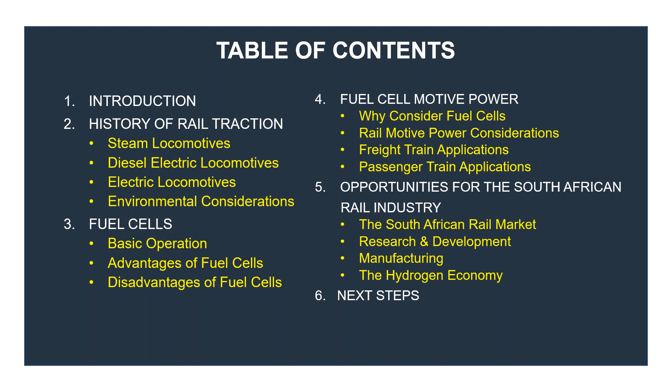Thank you for the kind introduction, Mr. Zwane. I will delve right into my presentation. My presentation will go through a brief introduction, a short history of rail traction. Obviously, during this short time that we have, it's not possible for us to get into a lot of detail, so it will be pretty fast. We'll then delve into the basic operations of fuel cells, fuel cell technology, and then consider in a little bit more detail how they can be and how they are already being applied in the railway industry. And then lastly, we'll look at the opportunities for the South African rail industry.

The situation we find ourselves in as human beings is that as we have advanced our civilization, that has come at great cost to the environment. The degradation to the environment wasn't really deliberate, but a lot of the circumstances were unforeseen. For instance, when the steam engine was first discovered, and the steam locomotive came into being, when we started building large coal-fired power stations, we were not really aware at that time of the negative consequences to the environment. But these are things that have come to, if you like, haunt us later on.

And railways, being a part of the improvement in civilization, have also come at great cost. And that's why we have progressed from steam locomotives to diesel electric locomotives to electric locomotives. And at the present moment, we're now looking at making railways cleaner and greener, and less polluting to the environment.

The unfortunate place we find ourselves in right now is, I believe, that we are part of that cohort of humanity that is tasked with doing something now, something tangible for the environment. Otherwise, we'll lose it completely for future generations. So basically, this presentation is a short look at how railways can become less polluting.

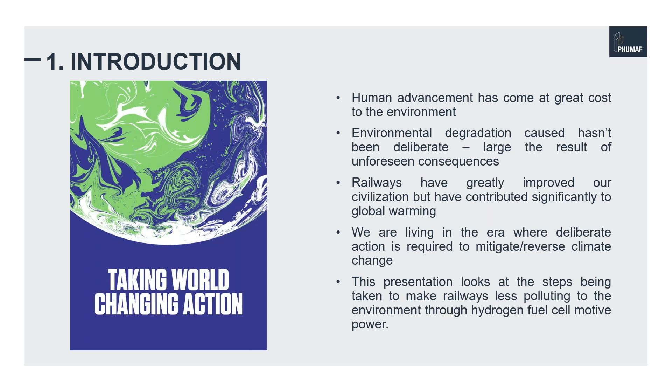What's already happening within the railway industry worldwide, and how South Africa can also become part of that revolution. If you look at the history of rail traction, we have come from animal-hauled railways back in the 6th century BC in Corinth, Greece. Modern railways really developed as a result of the invention of the steam engine, leading to the steam locomotives in the early 19th century, especially in Britain.

What happened then was that the railways reduced the cost of doing business, cost of shipping and communication, and the economic benefits to society were huge. But as a result of some of the inefficiencies, we needed to improve, and so railways became electrified. We started using diesel electric locomotives to the extent that right now, worldwide, probably the largest source of rail motive power is diesel electric locomotives.

But because of the pollution problems that we face as humanity, there is now a drive to electrify railways, as well as to see how the electrified railways themselves can become less polluting.

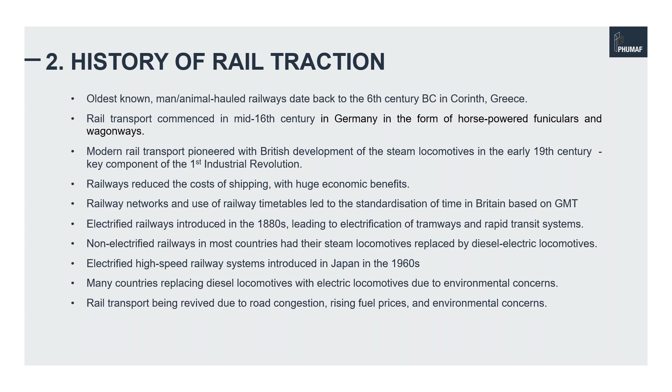The first real mover for railways was steam locomotives, and the operation and technology was simple and basic. Coal being the fuel source, you use a boiler to heat up water, and you use steam as the source of your motive power. These steam locomotives became prevalent in Britain during the 19th century, and they were used in the railway industry for quite a bit of the 20th century until about mid-20th century.

The major drawbacks were the limited efficiency, as well as the huge environmental problem we get from using steam locomotives. What's on the screen right now is a typical steam locomotive, showing its characteristics. The overall efficiency was basically up to a maximum of about 10%, with a huge emissions problem: sulfur dioxide, carbon dioxide, nitrates, particulates, and heavy metals.

As a result of these two issues, the inefficiency of the motive power source as well as the huge emissions problems, the steam locomotive was gradually phased out, to the extent that now very few railways worldwide use them. You can still jump onto some tourist or vacation trains that are run on steam locomotives, but as a commercial source of motive power, steam locomotives have largely been phased out.

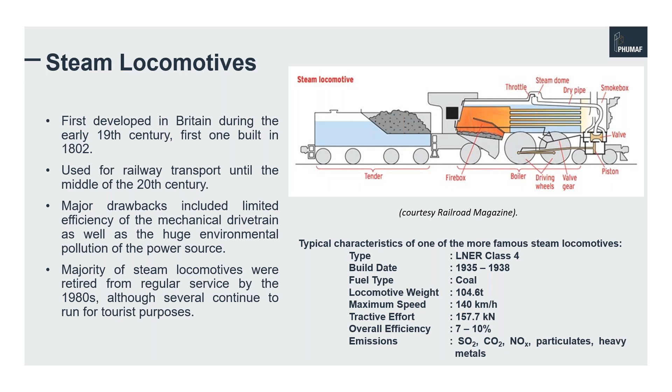Then we basically moved on to diesel electric locomotives. Essentially what happens in a diesel electric locomotive is we take an internal combustion engine running on diesel fuel and use that to generate electricity on board the locomotive. Early locomotives used to have DC generators, then we had alternator rectifier combinations, but these were used to drive DC traction motors initially, and then with the advancement of technology and improvements in AC drives, we tended to use AC drives for these locomotives.

The main advantage over steam locomotives was the improvement in efficiency, which came about as a replacement of the mechanical drive train by using electric transmission. So there is no direct mechanical coupling between the power source and the traction motors, and this resulted in a huge improvement in efficiency. Unfortunately, we still remained encumbered with emissions problems: carbon monoxide, carbon dioxide, nitrates, as well as particulates. However, the majority of locomotives still in use today are diesel electric locomotives.

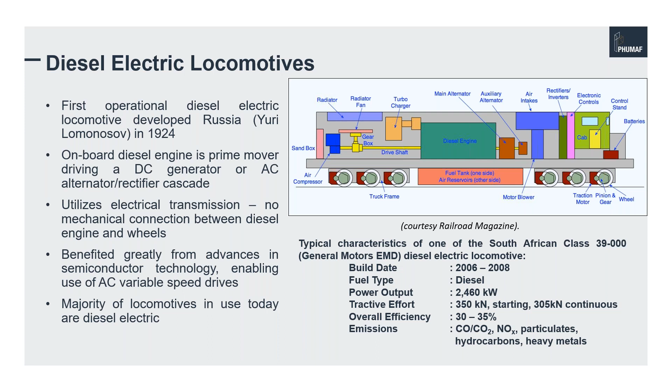But if we move a little bit forward, we then have electric locomotives. What happened here was we replaced the onboard generation of electricity on the locomotives by sourcing the electrical power from an external source, i.e. from the national grid via the pantograph on the locomotive.

This vastly improved the efficiency of the locomotive, if we ignore the source of the electrical power we are utilizing. So we don't have a diesel engine, we don't have a generator on board; we have bulk power components which are static and efficient. We had a huge increase in motive power as well as a huge increase in efficiency, and if we ignore the fact that this electricity is being generated somewhere else, then we also don't have negative harmful emissions from the locomotive. So very little emissions produced, and much less maintenance compared to the diesel electric locomotive.

And the trend nowadays is for most railways to actually electrify. Of course, the main issue that comes with using electric locomotives is that you need the supply infrastructure, i.e. your overhead catenary systems, or OHTE, which is our local nomenclature here, and that also then increases the cost of running electrified railways. But from the emissions point of view, from the pollution point of view, there is a vast improvement when you compare to diesel electric locomotives.

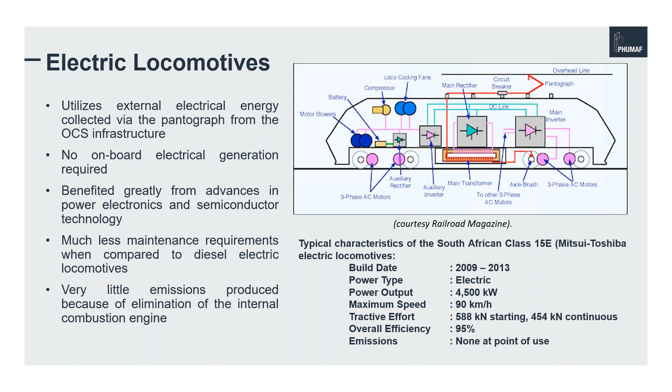So basically, quickly running through the environmental considerations, advancement has come at great cost. Rail transport, although it has improved the lives of people, has had a negative impact on the environment. Steam locomotives were extremely inefficient. Diesel electric locomotives gave us a vast improvement as far as efficiency is concerned over steam, but again, we still remained encumbered with the emissions problems. Electric locomotives are non-polluting at the point of use.

That is, when the locomotive is on the track, drawing power from its pantograph and pulling the train, we can consider it non-polluting there. But for us to be holistic and actually fair, we need to consider where that electrical power is coming from. In our country, in South Africa, the bulk of that power is coming from a coal-fired power station. And so from an environmental point of view, we must then include the efficiency of our coal-fired power stations.

And then if we do that, you'll find that the real life efficiency of the electric locomotives drops from 90 to 95% to somewhere around between 30 and 40%. And then also when we say it's got zero emissions, when we include the emissions of the power source, then we realize that it really is not that clean after all.

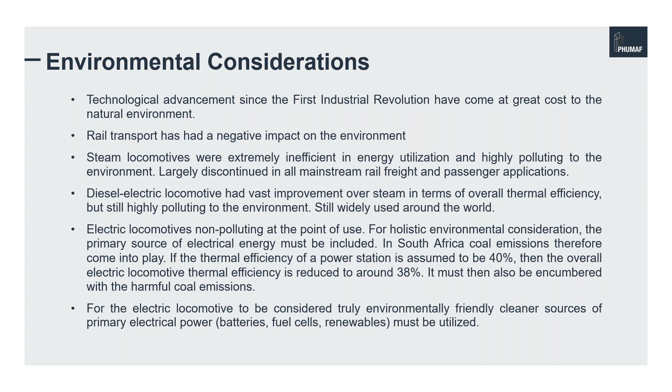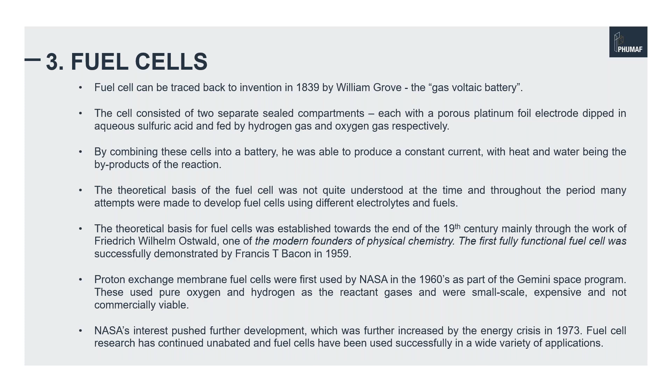Fuel cells. What I realized is it's a very interesting branch of chemistry or electrical engineering, and we really will not have much time to delve into fuel cells, but they can be traced back to 1839. And basically, in its basic form, let me move from this slide. These slides will be available for anyone who would want them. If I can basically go to the next slide.

The fuel cell basically uses hydrogen and oxygen as the anode and the cathode. And in this respect, it is different from the battery, because in the standard battery, the anode and the cathode are basically part of the construction, and they are consumed during the operation of the battery. Obviously, if it's a rechargeable battery, we can restore them. But in a fuel cell, the major difference is that the anode and the cathode are consumables.

So depending on the supply of the hydrogen or the oxygen, which basically depends on the type of fuel cell, the operation of the fuel cell is not really dependent on anything. Nothing needs to be replenished as long as you've got sufficient hydrogen and sufficient oxygen to supply the fuel cell.

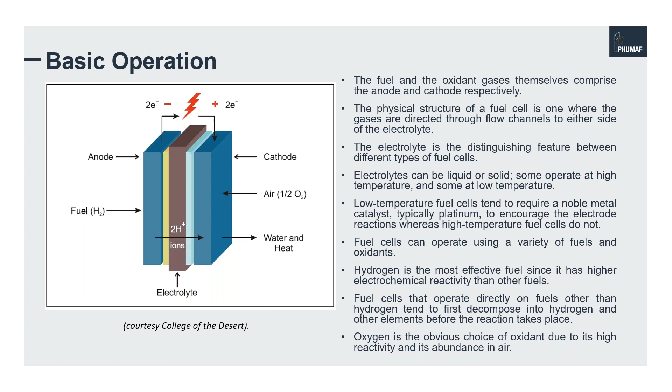So what I'm going to do here is basically go through quickly the different types of fuel cells. I think we can find this in the literature, and we don't have enough time to dwell a lot on the fuel cell itself. One of the more commercial types of fuel cells is the alkaline fuel cell. It operates on compressed hydrogen and oxygen and an aqueous solution, usually of potassium hydroxide, as the electrolyte. The operating temperature is relatively on the low side, between 150 and 200 degrees.

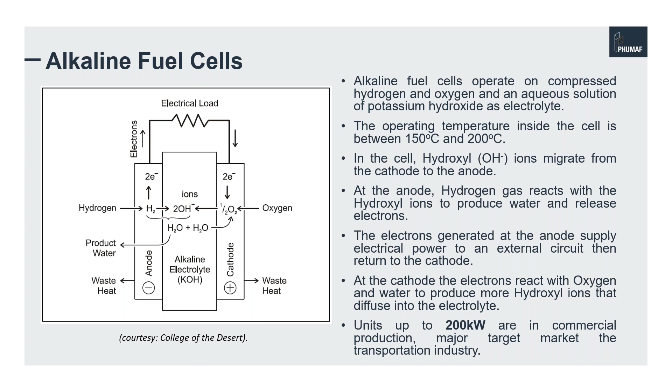And then there's a bit of a description on the actual transport mechanism within the cell itself. But I think the important thing is that commercial units of up to around 200 kilowatts are in current production right now as we speak. And then in the next slide, I discuss the advantages and disadvantages of alkaline fuel cells. They operate at low temperatures, have fast startup times, and a very high efficiency up to 70%.

They need little or no expensive platinum catalyst. Platinum, depending on the type of fuel cell being used, can be a very high cost component in the construction of the fuel cell.

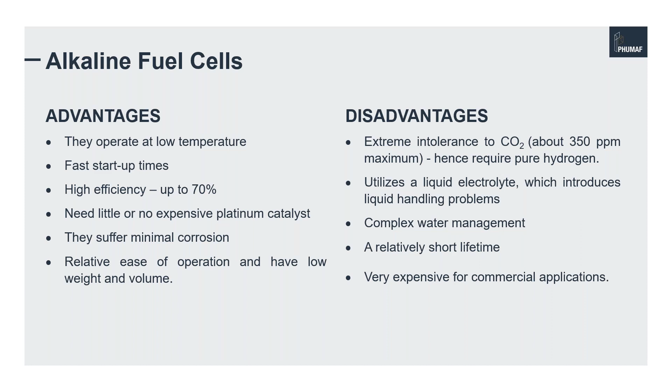On the disadvantaged side, they have an extreme intolerance to carbon dioxide, and the fact that the electrolyte being used is a liquid introduces handling problems. There are also water management problems within the cell itself, and it's got a relatively short lifetime. But they are in commercial use and operation, and there is an example of an alkaline fuel cell powering telecoms equipment somewhere in the Scandinavian part of the world.

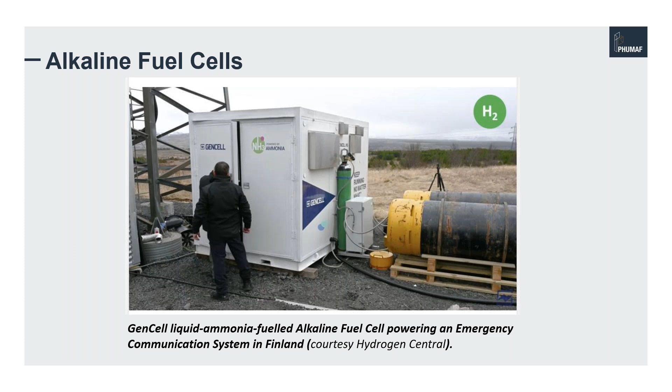The next major fuel cell type is the molten carbonate fuel cell. These use carbonates as salts. These salts are heated to quite a high temperature, where the salt melts and conducts carbonate ions from the cathode to the anode. Then again, we go through the transport mechanisms.

Demonstration units have been produced up to 2 megawatts. That's quite a vast improvement from the alkaline fuel cell, and designs exist for units of up to 100 megawatts.

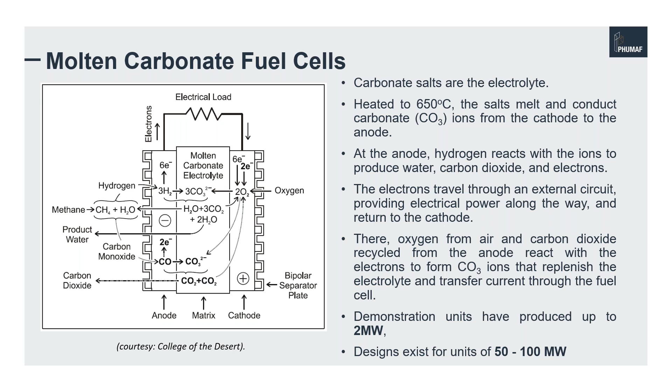The advantage is that they support internal reforming of hydrocarbon fuels. They also generate high-grade waste heat, which can be very useful in combined heat and power applications. This makes molten carbonate fuel cells very useful and suitable for stationary applications. Fast reaction kinetics means efficiency is also relatively high.

On the disadvantages side, corrosion becomes a major problem, and they are also highly intolerant to sulfur. We still have the same problem of a liquid electrolyte that introduces handling problems, and molten carbonate fuel cells unfortunately require a considerable warm-up period. That's because you've got to heat the carbonate until it melts in order for the cell to start functioning properly.

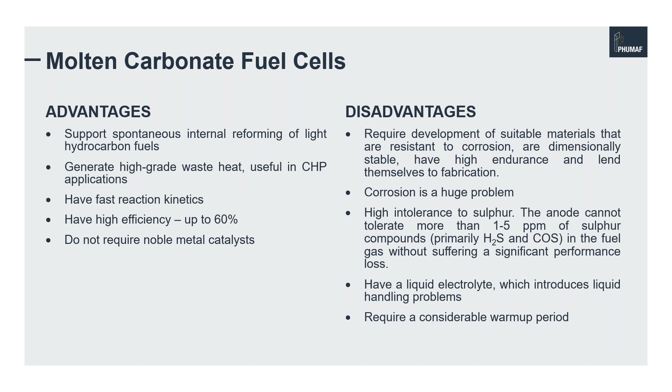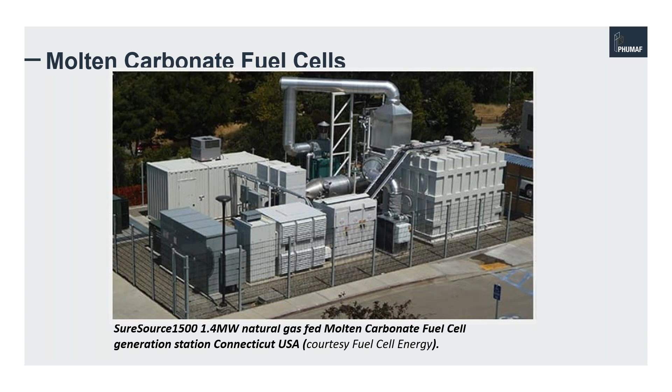The next major type of fuel cell is the phosphoric acid fuel cell. Again, this one operates at relatively low temperatures. It uses phosphoric acid within a silicon carbide matrix as the electrolyte. Again, we go through the transport mechanisms.

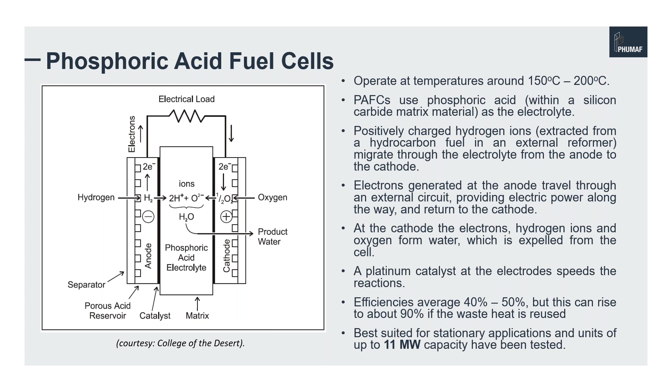The efficiency of this cell is basically up to a maximum of around 50%. But if the waste heat produced in the cell is used to regenerate electricity, then you can increase that efficiency to around 90%. It's best suited for stationary applications, and units up to 11 megawatts have been tested.

The major advantage is that the phosphoric acid fuel cell is highly tolerant to carbon dioxide. As a result, you can actually use unscrubbed air as the oxidant and reformate as fuel. It operates at low temperatures, as we saw, and it's also got stable electrolyte characteristics.

On the disadvantages side, we have low carbon monoxide tolerance. It uses a corrosive liquid as electrolyte, and that becomes problematic as far as handling is concerned. It also allows product water to enter and dilute the electrolyte. Phosphoric acid fuel cells tend to be large and heavy, and they can't auto-reform.

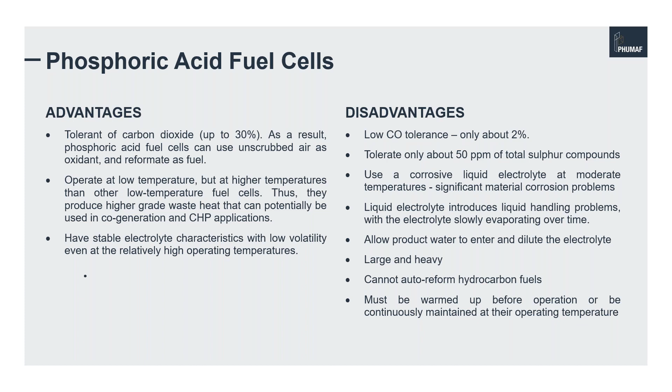The next type is the proton exchange membrane fuel cell, the PEM fuel cell. This is probably one of the more popular ones, especially when it comes to transportation applications. Toyota has got a vehicle - I haven't seen one in South Africa, but there are quite a few examples worldwide. The Toyota Mirai, which is a hydrogen-fueled car, actually uses PEM fuel cells.

Basically, these work with a polymer electrolyte in the form of a thin membrane. The membrane is small, it's light, and it works at low temperatures, which is an advantage. Unfortunately, this particular fuel cell requires a platinum catalyst on both sides of the membrane. Then we go through the transport mechanism within the cell itself. Efficiency is in the region of 50%.

If you are to use this with any other source that is not pure hydrogen, then you need a reformer, to use other fuels, like methanol or natural gas or whatever.

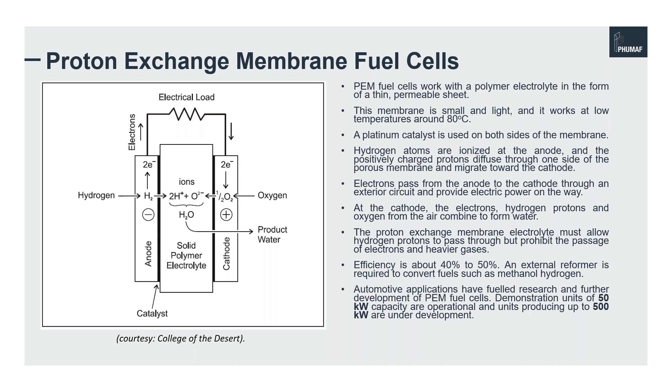The advantages of PEM fuel cells: they are carbon dioxide tolerant, they operate at low temperature and pressure, and this simplifies the materials that we need to use, and it also provides for quick startup. They use a solid electrolyte, so the issues of handling liquids become less of an issue. They use a non-corrosive electrolyte. Pure water operation minimizes corrosion problems and improves safety.

On the disadvantage side, we still have the low tolerance to sulfur compounds. It needs reactant gas humidification. This can be energy intensive and increases the system complexity, which then has the tendency of reducing the overall efficiency of the system.

Unfortunately, it requires the use of the platinum catalyst. I think that's one of the things that we have to trade off for the low temperatures and ease of operation of this fuel cell. And the use of the expensive membrane that is difficult to work with can be an issue. But the way manufacturing is right now, it's actually becoming a very mature kind of fuel cell, and some of these things are becoming less and less of issues.

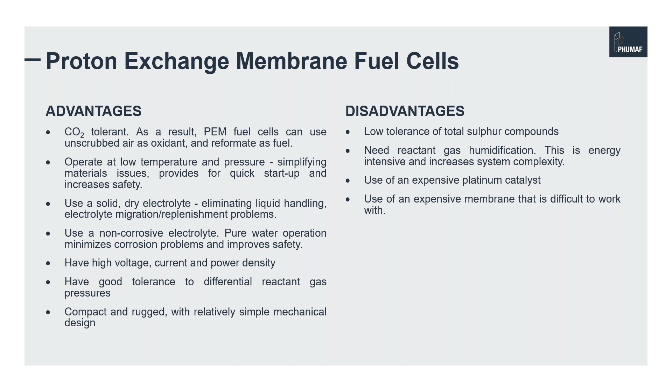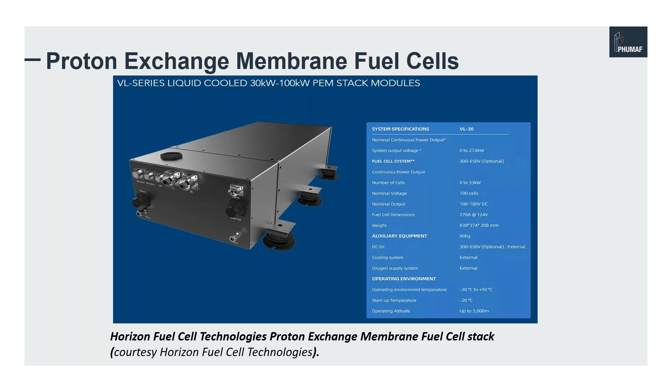That's an example of a fuel cell stack from Horizon Fuel Cell Technologies. And the transportation industry, being cars as well as buses, have actually driven the development of PEM fuel cells.

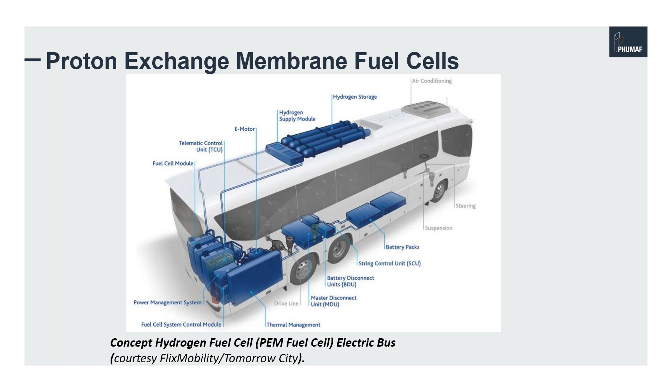The last fuel cell type that I'll talk about now is the solid oxide fuel cell. This uses a hard ceramic electrolyte and operates at very high temperatures, up to about 1,000 degrees Celsius. A mixture of zirconium oxide and calcium oxide forms crystal lattice, though other oxide combinations can be used.

The generating efficiencies of the solid oxide fuel cells are actually up to 60%, and they are best suited for stationary applications. Demonstration units, up to 100 megawatts, are under development.

What I find a little bit exciting about solid oxide fuel cells is I believe that there is a company already in South Africa that is embarked on the manufacture of these fuel cells, and I see a lot of opportunity for these fuel cells, especially the solid oxide fuel cells, in terms of storage and in terms of being coupled to some of the renewable energy sources that we have, to make the power that's being generated there more dispatchable.

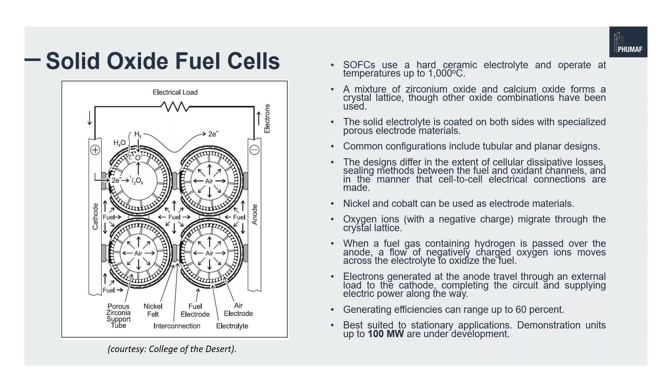So we then go through the advantages and disadvantages of solid oxide fuel cells, and the major disadvantage is obviously the very high operating temperature, and that's why they are really only suited for stationary applications.

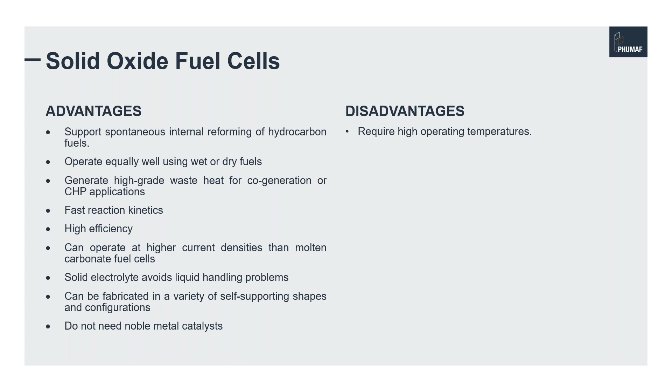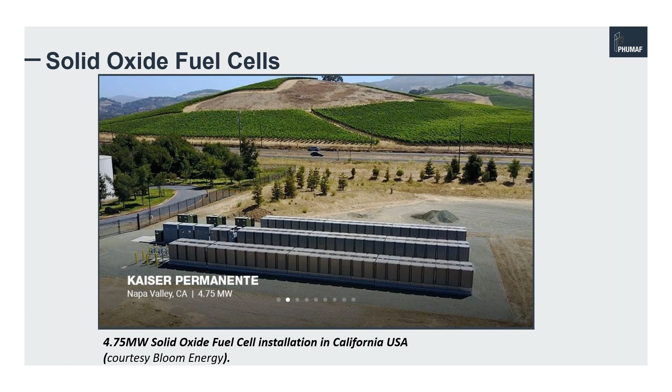Again, they are in commercial applications, and that's an example of a 4.75 megawatt solid oxide fuel cell installation in California in the United States.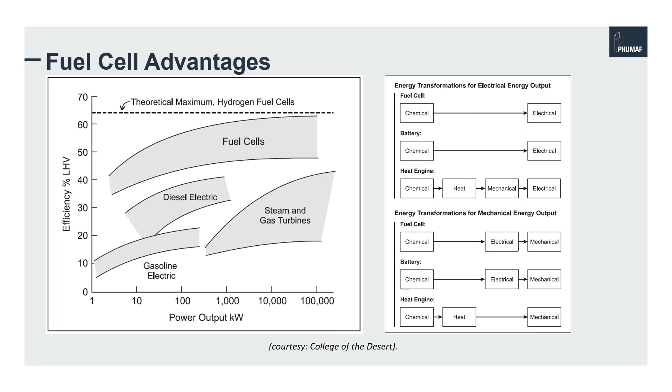I think I need to be moving much faster than I am. On the side there, there's a slide on the energy conversion, comparing the fuel cells, the battery, as well as the internal combustion engine. I think I'll skip that. Basically, that's a comparison of the fuel cell technologies that we've already gone through.

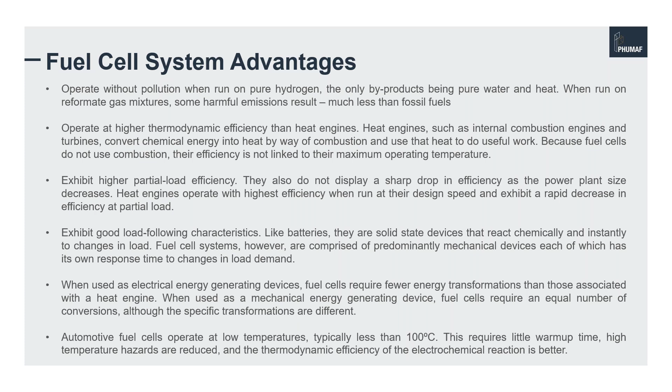So the advantages of fuel cell systems, basically, it gives us the opportunity to generate electricity with little or no pollution. I must emphasize here that it's zero pollution if we're running it only on pure hydrogen. But then again, the question comes, how was that pure hydrogen sourced? If our hydrogen has been manufactured through electrolysis using renewable electricity, i.e. electricity generated from solar, wind, or other renewable sources, then we can consider the fuel cell pollution-free. But at the moment, the bulk of the hydrogen that's commercially on sale is what you could call either gray or blue. And what that means is that the hydrogen fuel cell will only be pollution-free at source. But when you consider the overall environmental impact, then it's not completely pollution-free.

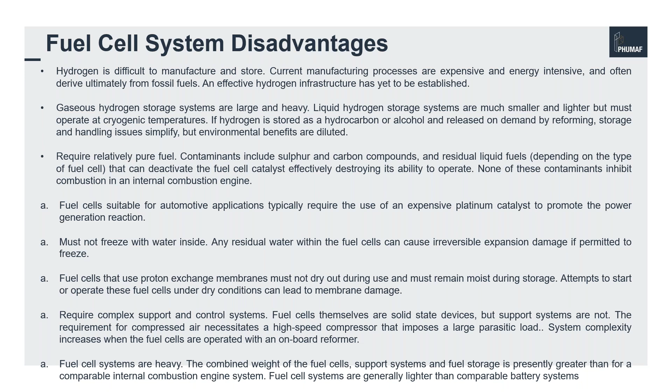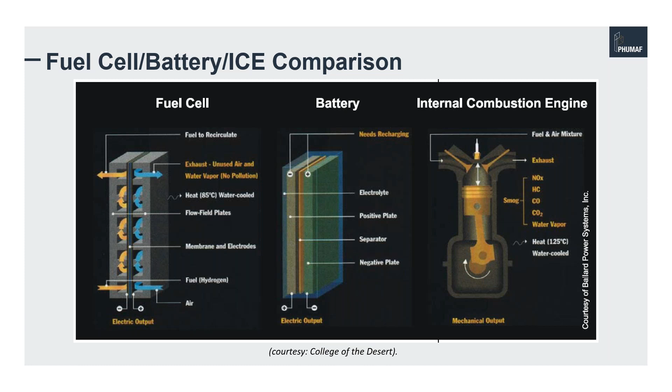There are some disadvantages which relate to manufacture, which also relate to storage. A lot of these disadvantages, we are finding ways around, to the extent now that we can actually utilize fuel cell systems in a safe and environmentally friendly way. Again, that's another slide that basically compares the fuel cell to the battery, to the internal combustion engine.

So as far as the power source is concerned, whether it be a steam locomotive, i.e. coal firing a furnace which heats up a boiler to give us steam, or whether it's the diesel engine, the diesel fuel in the diesel engine, or electricity, what is required is for the power to be available to the locomotive or to the train at every part of its journey. In other words, the instantaneous power output of the locomotive or of the source must always match the instantaneous power demanded by the load as the load is changing. And also, it is important that the power unit operate in its optimal or safe operating region throughout.

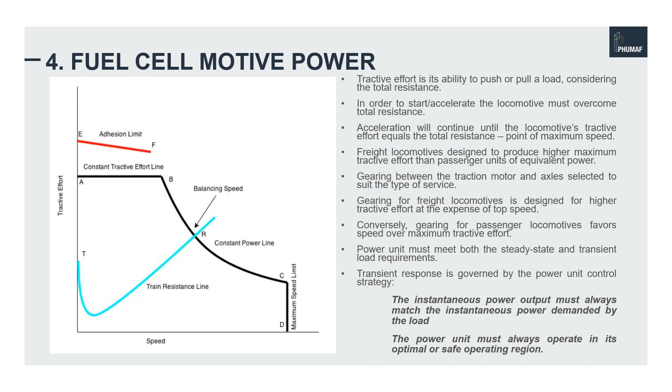So why should we consider fuel cells in the rail environment? I think the main focus for transportation up until now, and now I mean maybe 5 or so years ago, has been on trucks, on buses, and on cars. But the research on rail transportation has lagged behind. However, we are no longer that far behind as far as the rail environment is concerned. In 2019, Alstom revealed plans for a pilot project for a passenger train.

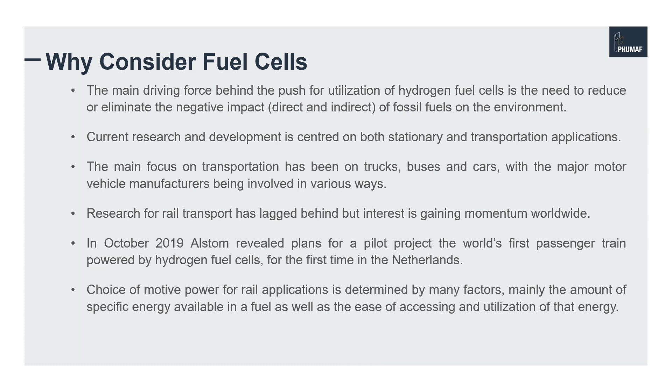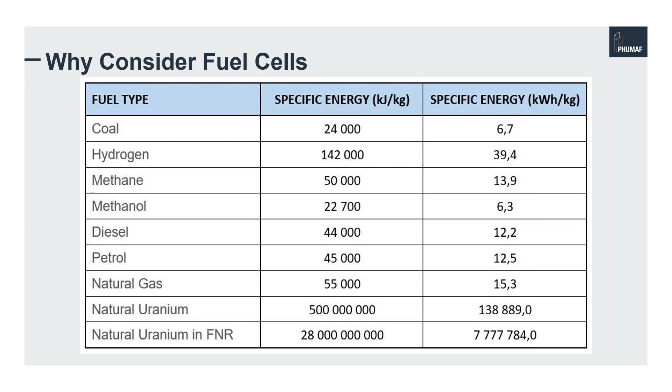And although the motive power for rail applications is determined by many factors, the environment in terms of efficiency and in terms of pollution must right now and going forward become a major consideration in everything that we do. When you consider fuel sources, this slide shows that outside of uranium, hydrogen has the highest specific energy that we have. And it would obviously be good if we can utilize that energy and that efficiency. I think I'll skip a little bit for time reasons.

One of the issues that always comes up with hydrogen is safety. How safe is it? But there are a lot of things that go for hydrogen. It's not toxic, and a leak will not contaminate the environment. It's very light, so when it leaks, it rapidly rises to the upper atmosphere. It is highly flammable, but it's been produced, stored, and transported very safely for more than 50 years. It also has a much lower radiant heat capacity than conventional fossil fuels.

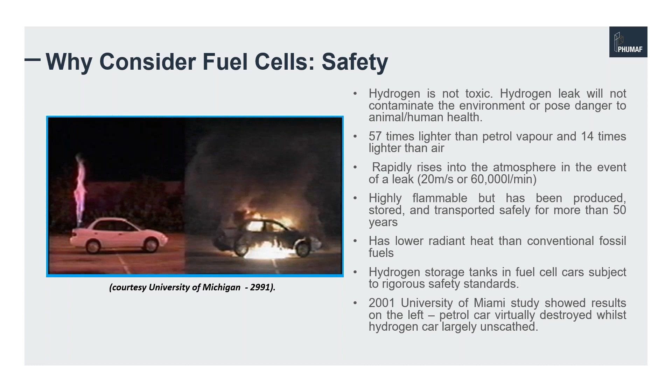When you compare an electric locomotive versus a fuel cell locomotive, the electric locomotive utilizes external power. The fuel cell locomotive, just like the diesel electric locomotive, generates its own power. The result is that the electric locomotive requires extensive external infrastructure in the form of OCS equipment, as well as the utility grid, which the fuel cell locomotive does not need.

The electric locomotive is extremely efficient if you don't consider how the power is being generated. Whereas when you compare apples with apples, it's generally true that the fuel cell locomotive will actually be more efficient than the electric locomotive, unless you are accessing electricity from an extremely efficient source.

The electric locomotive has zero harmful emissions only at the point of use. We've discussed that before. The fuel cell locomotive will have zero harmful emissions at the point of use too, depending on how the hydrogen has been sourced.

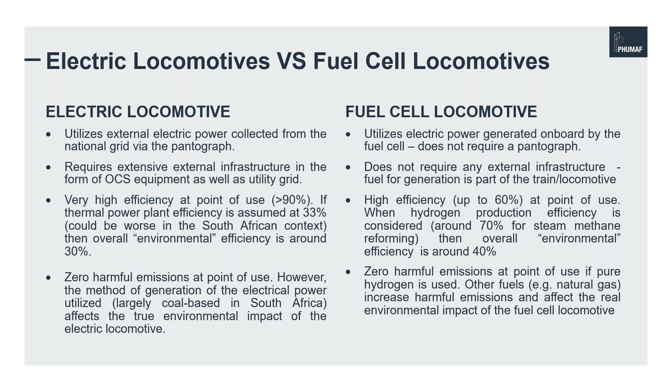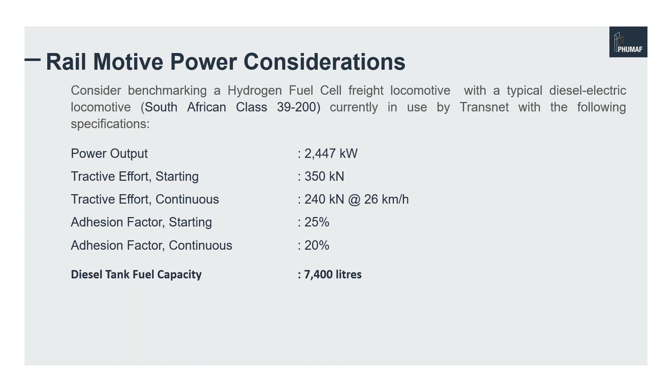So what I then did was take a typical Transnet locomotive, class 39200, and looked at some of its energy requirements. This locomotive has a diesel tank with 7,400 liters capacity. Those are some of the curves. If you look at that locomotive, it stores 7,400 liters of diesel. Looking at the graphs and curves, it's storing a total amount of energy which is 270,899 megajoules.

Now, if we wanted the same locomotive with the same energy capacity but utilizing hydrogen as a fuel source, that translates to needing a 50 cubic meter tank of hydrogen, which gives you the same amount of energy, coming from about 2,000 kilograms of hydrogen pressurized at 700 bar. These are graphs on hydrogen storage, which we can use to determine how you store hydrogen. If you look at this graph, region 2 is where I'm operating, around 20 degrees Celsius, 293 Kelvin, whereas region 3 is the cryogenic range.

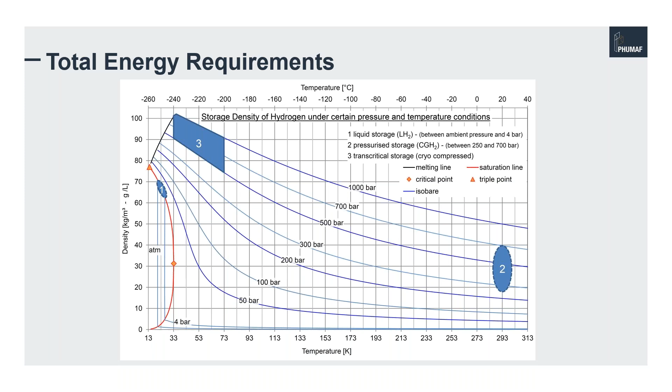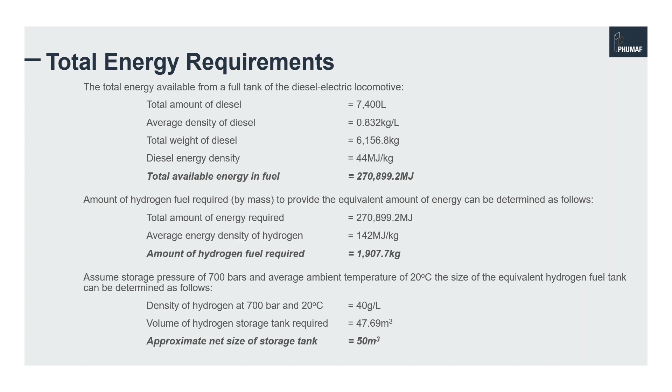So this shows that it is possible to take a locomotive like the class 39200 from Transnet and essentially retool, refit, and run it on hydrogen as a fuel source using hydrogen fuel cells.

So what that means is you'd start with an existing locomotive, remove the diesel engine, the alternator and rectifier combination, remove the diesel tank and everything associated with that power source, and then replace it with a hydrogen fuel cell and hydrogen storage. You'd also need lithium batteries for starting, etc. The hydrogen fuel cell and lithium battery would then have to be correctly sized and specified to suit the traction motors, the locomotive control systems, the auxiliaries, etc.

Appropriate hydrogen storage and fueling facilities would then have to be established. If, for instance, Transnet or PRASA decided to have a pilot route, that would then have to be established. And obviously, new practices, safety standards, and codes of practice would have to be written and developed. Maybe they are already there, I'm not very sure.

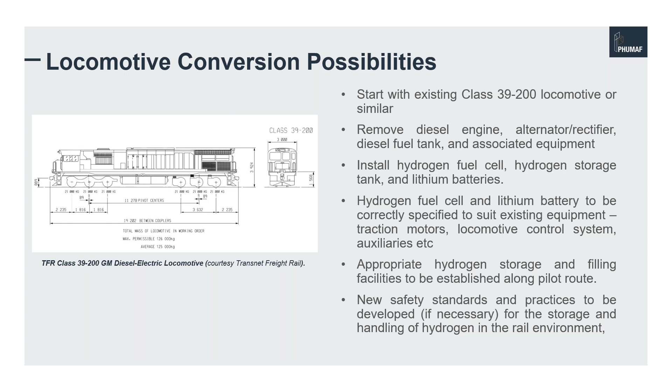Just to show that what I am talking about is not really a pie in the sky, it's already been done. There's an example here from Canadian Pacific Rail, where they took basically a locomotive that is very similar to the Transnet Class 39 that I was talking about. They took this as a pilot project.

It's being run by Canadian Pacific as part of their sustainability commitment. In fact, they received honorable mention at COP26, I think it was last year in Scotland. They have currently around 400 million rands committed. The locomotive was demonstrated last year, actually in September.

And like I said, it's a conversion of an existing General Motors diesel locomotive. It utilizes Ballard PEM fuel cells, hydrogen fuel cells and batteries. And it's going to use green hydrogen from Canadian Pacific's own solar-powered electrolysis. So they wanted to make sure that the hydrogen is pure, so they are generating the hydrogen using electrolysis that is being powered by solar power.

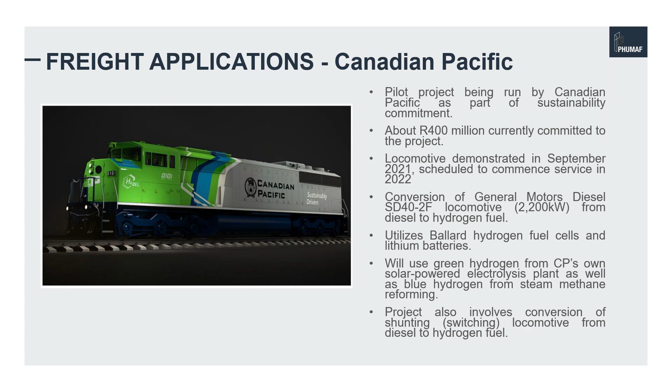And they have plans to convert some of their shunting locomotives. Obviously, this particular one is a mainline locomotive, and trials are underway right now.

Another example is a similar locomotive, a little bit smaller, but built by CRRC Datong in China. The locomotive is in service in Inner Mongolia. It utilizes hydrogen fuel cells and lithium batteries again, and it's got a total output of 700 kilowatts, maximum design speed of 80 kilometers per hour.

The only thing that I found rather an irony as far as this locomotive is concerned is, on the line that it's being used to transport mainly coal, so we are using a very environmentally friendly hydrogen fuel cell locomotive to transport coal.

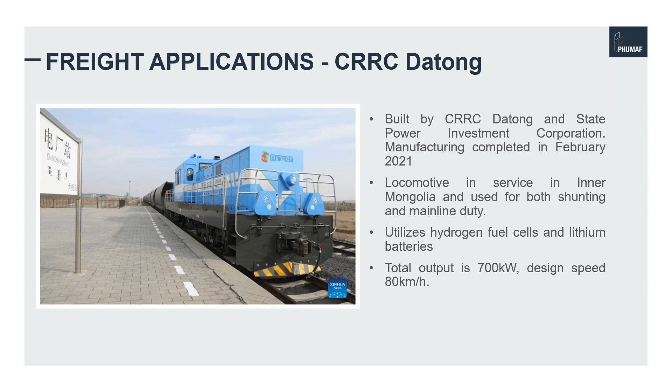So basically what this shows is that from a freight rail point of view, it is possible to actually convert existing diesel electric locomotives to run them on hydrogen fuel cells.

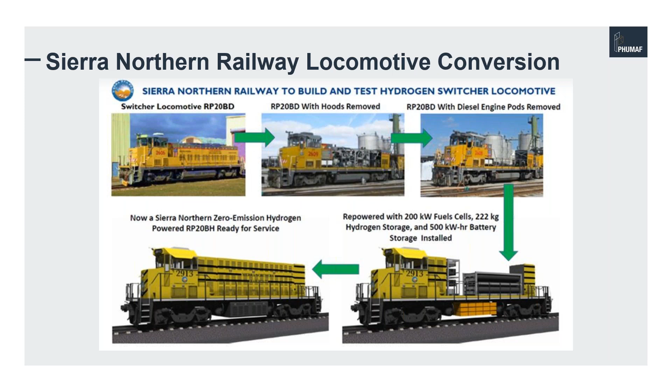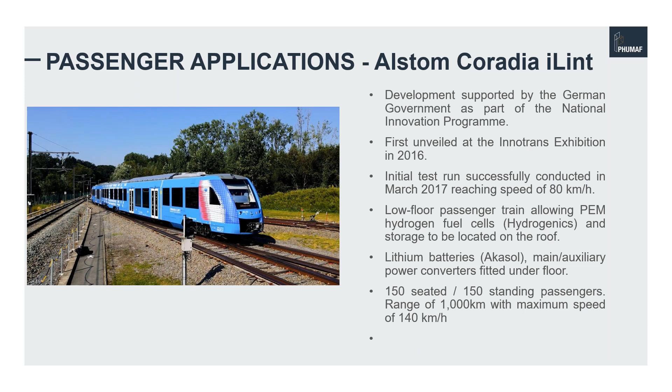So basically, what this shows is that hydrogen fuel cell trains or motive power is possible both in the freight as well as the passenger environment.

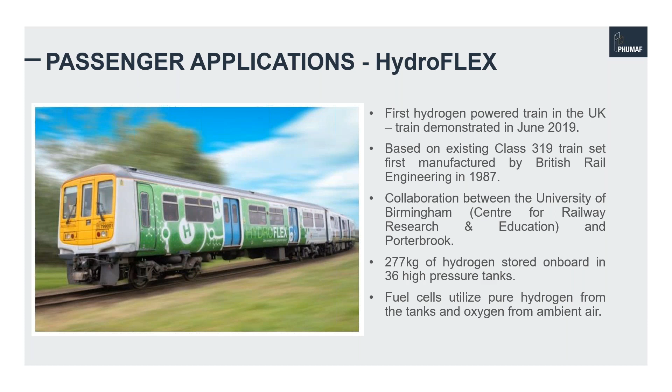So if we look at the rail market, the South African rail environment now, and now I'm coming to a close. I think we have the most advanced rail network in Africa, possibly, definitely in sub-Saharan Africa, although it's got a lot of its problems, a lot of which has been due to underdevelopment.

Underinvestment, and a whole host of other issues. But the government has been crying for private sector participation. Obviously, the policies have to be in place to allow for meaningful private sector participation. But I do believe that the government is serious about it, and it will happen. And I think it will be a good thing, as the private sector becomes more and more involved in the South African rail market, that we come in with newer technologies, like fuel cell locomotives, to reduce the impact on the environment.

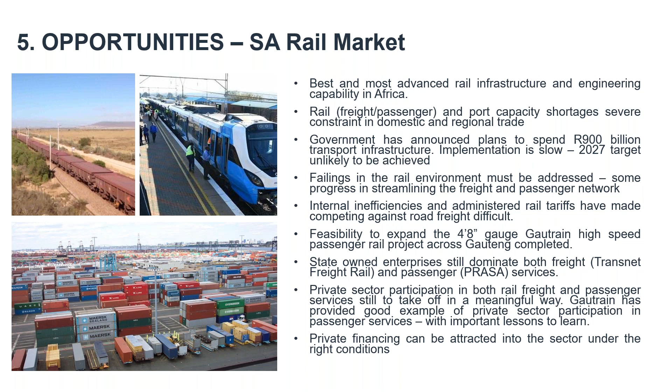And, when I was doing the research, I think on an annual basis, the country loses more than 10 billion rands to the theft. In fact, last year, I think Transnet Freight Rail reported a loss of more than 1,000 kilometers of cable between January and October last year.

From the press, there's news that Transnet is reconsidering de-electrifying some routes and running diesel-electric trains. I think this presents an opportunity for introducing hydrogen fuel cell powered trains in these areas where Transnet feels they can't continue running electric trains because of theft, but instead of reverting to diesel-electric, we could use

hydrogen fuel powered trains. PRASA faces pretty much the same problem as Transnet Freight Rail. So there's an opportunity to run hydrogen fuel trains if they're available, and this makes it more urgent for us as a country to dig deeper into research and development, because as far as we're concerned, I think we've got enough research and development facilities, as well as manufacturing facilities within South Africa, for us to become at par with the rest of the world, and maybe even lead in other things.

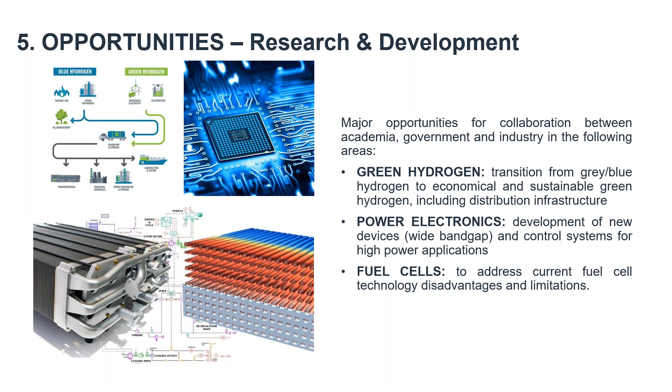As far as railways are concerned, South Africa actually is a very good base for rail engineering, both within Transnet itself as well as within some of the other private companies that used to support the rail industry. I think what we need to do is resuscitate that, and as we resuscitate it, we get ahead of the curve in terms of technology, and that can become a very good platform for us to advance, and critically, to create jobs at every level - at the high level in terms of R&D, at the manufacturing level, and even at the operating level.

I think one of the things the rail industry wants to do within the country, as well as within the region, is to move freight, especially away from the roads and back onto rail. And I think we can do that as we make the railways more efficient and more environmentally friendly.

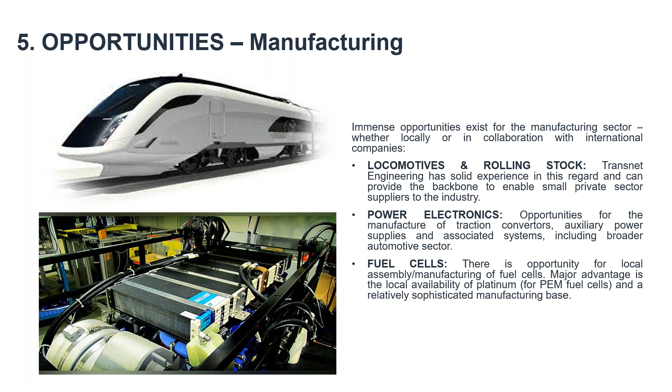I think with that, I'm pretty much coming to an end. This basically says there's a whole hydrogen economy. There's been a lot of talk around the hydrogen economy, both from the supply side as well as from the utilization side. And rail transport can become a very good enabler as far as the utilization side of the hydrogen economy is concerned, especially by going hydrogen fuel cell motive power, both on the freight side as well as on the